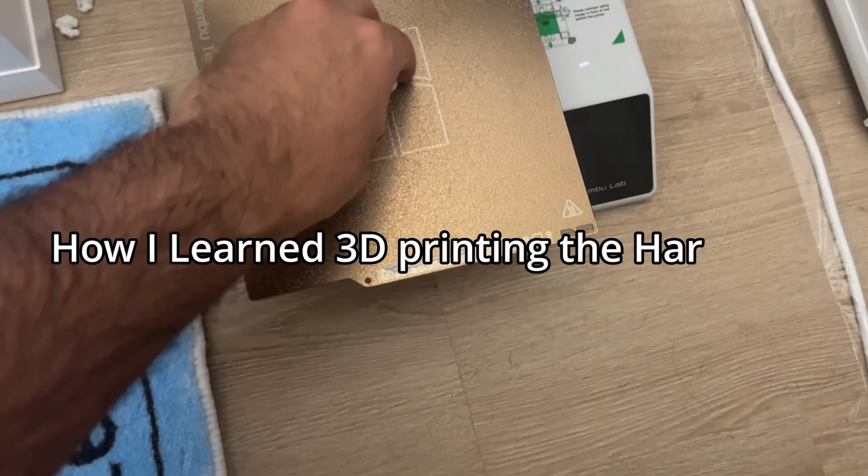Black Friday was just a few days off. And during that same time, in India, there's a festival called Diwali. Some of you may know. I was planning to visit back home, and I thought I'll give some of my friends a call and ask them if they need anything from here. Something as a souvenir, or something they don't get back in India, some kind of food, or something that would have been more expensive back there.

But obviously, I did not expect them to actually ask for something. It was going to be such a bother, like having to pack the thing, getting it through security, and actually getting it to India to them without breaking it, spilling it, or eating something if it was food. I get hungry, dude. What?

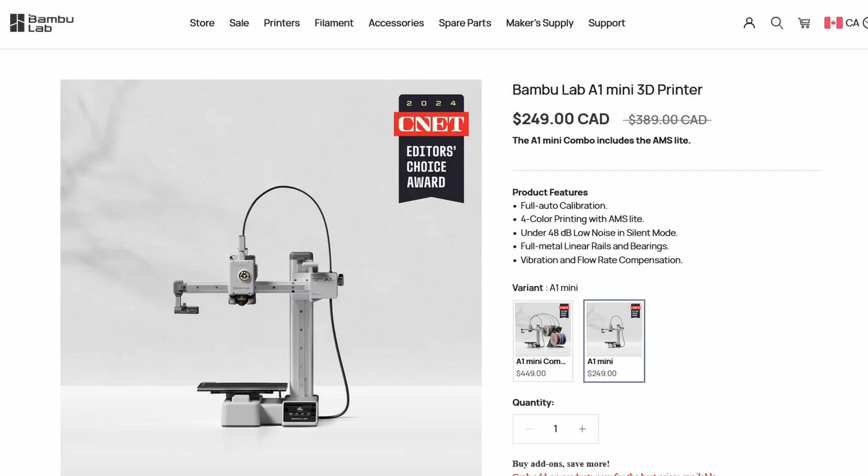But a friend of mine, let's name him something generically Indian like Rohan, asked me if there was a sale on the Bambu Lab website. He wanted the A1 Mini from their website. He wanted to get into 3D printing. He had used a few 3D printers back in university, but he never had one of his own, so he wanted one. And I checked, and there was a pretty big sale. It's usually $400, but it was $250. It was still $250 for some reason.

Oh well. And since I was the one who offered to get it, I thought I'll actually get it since he asked me. I thought it's a small 3D printer. I checked the dimensions on the website. It seemed small. It has to fit into one of my suitcases. I have bigger luggage. It should be able to fit in one of those. It arrived at my house, and that box sat in my room for 6 weeks. I had 6 weeks to check if that box fit into my suitcase. Guess when did I check? 2 hours before leaving for the airport.

I called him, panicked, and told him, "Hey dude, I tried fitting the box in the suitcase. It doesn't fit. I tried taking it out, fitting it without the box, just the printer. It wouldn't fit. It could break and blah blah blah. Sorry bro, I can't get it." And then just before he could say, hey, but did you try this, blah, blah, blah, I said, I'm getting late, I need to leave, sorry, bye. And basically he had to get the printer from India. He paid a little bit more, but I don't think he regrets it. He made some 3D prints and started selling them. He made his money back in like 2 months.

But when I came back to my house, I still had a 3D printer sitting in my room. Well, I checked if I could return it, but I was a little too late. Let's say 1/4 of the year too late. Well, now I had two options. Either I could sell it on Facebook Marketplace, or I could try 3D printing for the first time. And this is a story of how I dabbled in a new hobby and made some horrible 3D prints without knowing anything about a 3D printer.

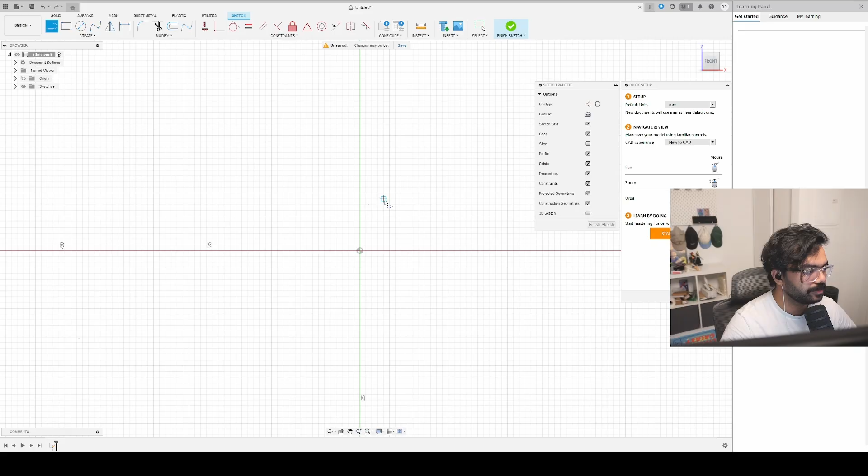Mind you, I only have PLA and PLA carbon fiber, and I did not have the hardened steel nozzle yet to use the PLA carbon fiber. I did not know if it could hold the weight of a whole human, or maybe two. Who am I kidding? Well, anyway, I took out my calipers and started taking the measurements, and the modeling was going to be done in Fusion 360. I decided to learn this because it's used for more precise modeling, whereas Blender is more for art. I don't know. Somebody on the internet told me to use this, and that's what I did.

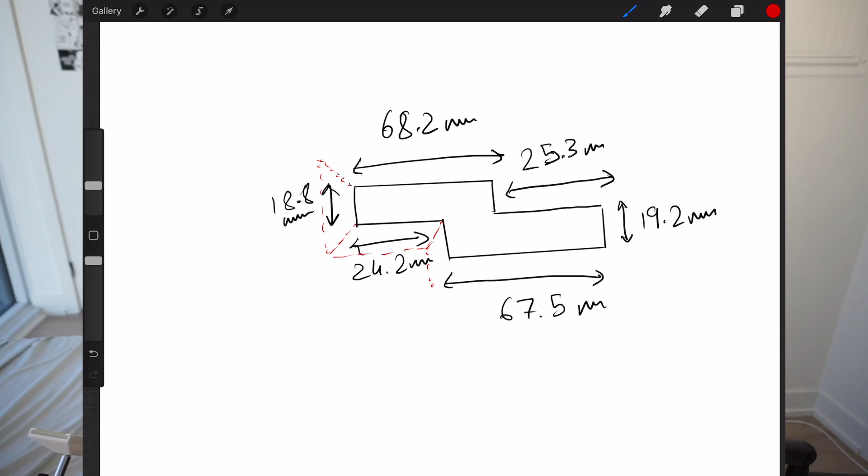And in the process, I learned something new. It was a bit hard to learn. It was a whole new way of modeling things. It's pretty different from Blender. You have to first set the constraints and then make the shapes, which is kind of new to me, but I got used to it pretty quick, at least for basic shapes. The measurements I took were used for the base, and then I made a, I don't remember, 5, 2, or 3 mm thick wall outside those measurements.

And for the height, I wasn't sure, but I was like, oh, let's lift it up like 6 inches. That should be enough. It always is. It always is. But I guess it was a little bit too much this time. It sometimes is. You can't help it. I know that the sun is setting while I record this, but I can't help this. I'm lazy enough

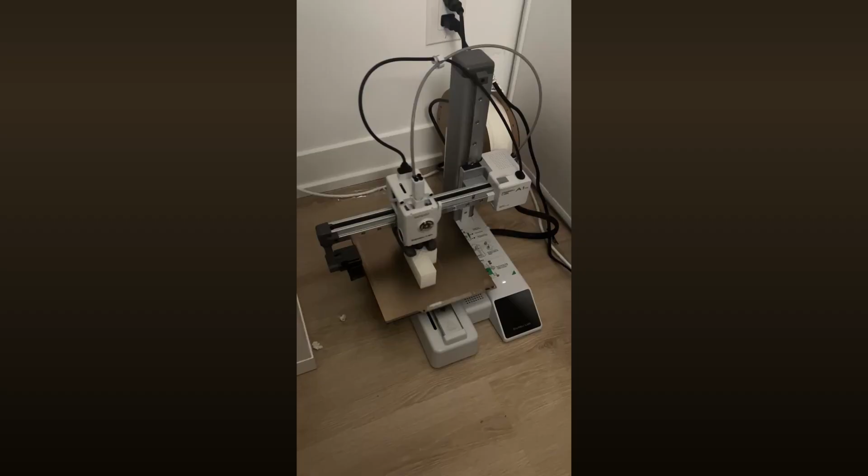already. I was so smart that I decided to print the whole thing. I didn't think of it yet that I could print just a few layers, take it off, and then see if it fits, and then make the whole thing. I made the whole thing. It was so much plastic. I wasted all of it because it was too tall, and I was scared that it'll break, or it was just not stable enough. And also it didn't fit. It didn't fit the leg.

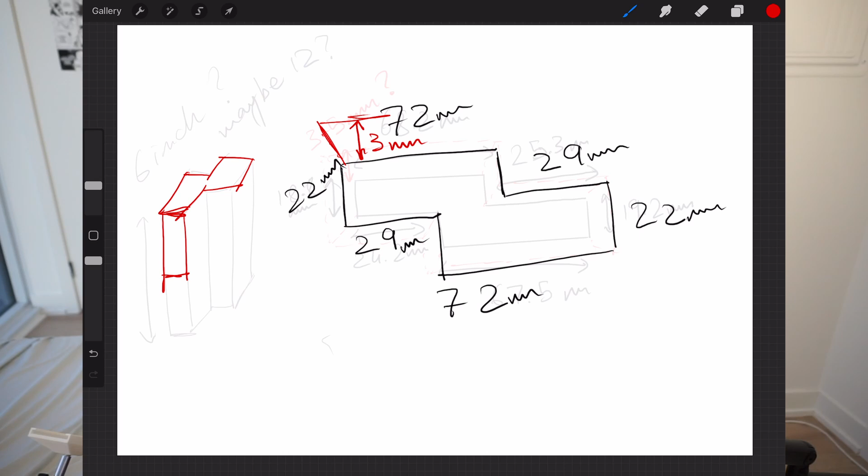See, the problem was the bed legs are wooden and all of the legs have slightly different measurements because wood is not that precise. So what I needed to do was take measurements for all 4 of them. No, fuck it. I didn't do that. I just made all the sides big enough so that all 4 of them fit, and I printed 4 of those. I did not want to waste more time on this. This was not the most challenging thing. It was just a measurement error and I didn't want to do it.

But guess what? It's been 3 months. It's working great. I've jumped on this bed. I've stood up on this bed to fix lighting. These bed legs have gone through enough. I've dropped the bed on the leg, but hey, finally, I just need to pick up the bed a little bit and then shove the boxes in, and it works. It works great. I don't have any complaints with it.

Hi, just a quick update. So if you see there, that bed leg is not there, and these are. So what happened was I printed one which was not the exact dimensions. So I just chopped off these corner pieces because this was not the right dimension, but these were. This was fine, only this thing was not the right thing. But anyways, I just chopped off these things and I had it there, out of sight, out of mind. I think that's what the saying is.

But anyways, the point is, it was there and I kept moving the bed. Sometimes I would just jump on the bed and it would move. And when I had to take out these boxes, it would move. But after doing that a lot of times, this thing cracked because I had chopped it off. So the bond on this layer had basically, you see how clean it is? It's because this was the Z-axis and this is how the pressure was hitting it, and it basically broke it. So I am printing another one right now.

Next level was an IKEA pegboard hook. Seems easier than the bed legs, you would say, but it actually isn't if you really try to make a really good hook. I knew somebody on the internet must have made it already because I got the same IKEA pegboard as the one that everybody and their mother have. But my big ego wouldn't allow me to do it, and I'm doing this whole thing to learn the process. So it wouldn't help if I just download something and print it.

This time I needed to be a lot more precise with the measurements. So I took my calipers and measured the inside of the pegboard holes, the total thickness of the whole pegboard, how much space the pegboard holes have vertically, because basically I needed the tail of the hook to go inside of the hole and then pull down on it to actually lock the hook in place. When it comes to modeling the hook, it seemed pretty easy. I just had to make a few lines, round the corners off, and make a cylinder out of it. The modeling was pretty simple, but it still took me a few tries.

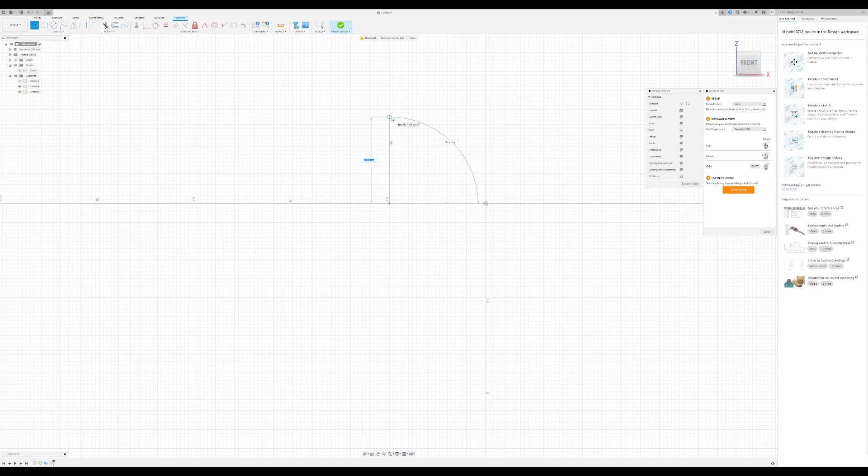I was only going to hang hats on this, but in case I ever want to use this model to hang something heavier, I would want it to be strong too. So there was a certain orientation that I needed to print it. The base is the X and Y axis, and as it gains height, it goes in the Z axis. Now, if there's any perpendicular force to the Z axis, there's a higher chance of breakage. I had to print it in a way so that the force is always parallel to the Z axis. When the first hook was done, I was pretty positive.

I took it out, I hung it on the pegboard, but it was a bit too loose. I left too much gap between the tail of the hook and the front of the hook, so it did not really grab on to the pegboard as tight as I needed to.

But the plastic was still hot. I tried bending it, I tried crimping it with my hands, and then put it back onto the pegboard. It kind of works, but still, maybe once it cools down, maybe it doesn't work. But hey, my roommate used it to hang keys. So I went back to the modeling.

I reduced the distance between the tail and the front of the hook by 0.5 millimeters and printed one again, tested it, worked out great, printed 3 more all together this time using the duplicate function on the Bambu Lab slicer software thingy. I don't know what you actually call it. Is it slicer? I don't know, bro.

Hey, it works now. I have the hats hung right over here, and you can see I use those hats every day, and I sometimes grab them and put them back on those hooks with a lot of force, and they still haven't broken. So hey, that's a success.

By the way, a genuine shout out to this thing. I know I've mentioned this already and what it does, but dude, the last time I used this thing, I was in 11th grade and I was doing a practical for my physics lab. I remember specifically an experiment where I was thinking, I'm never going to use this thing. It was a metal one, not an electrical one. So I had to measure it by hand, and sometimes the measurements were off. So I also had to write down that the measurement might be off by some millimeters and stuff. And I was like, I'm never going to use this in my life.

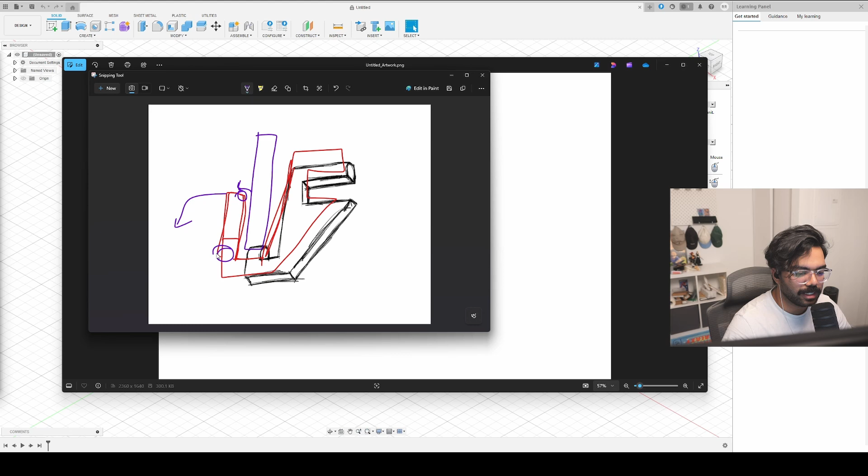And I want it to tilt so that my laptop sits like this. If it sits like this, it'll put pressure on here, which can break. So we don't want that. If this breaks, then my laptop falls. It's gonna put more pressure over here and it can break. If my laptop's sitting slanted like this, it's gonna put pressure here directly instead of here. So this is not gonna break. And here, there's nothing to break.

It's gonna put pressure here when the laptop sits. There's gonna be pressure here and here. So I have to make sure this doesn't slide off. All right, that's all I have to make sure. So I'll just make it long. And also, it's still plastic, and the MacBook is aluminum, I think. So it would not scratch it, but just to be sure, I would leave a little bit of gap so I can smoothly just slide in my laptop and take it out.

And I just needed to make sure that I have this dongle on my laptop. So my laptop needed to sit like this so that my dongle wouldn't be in the way. And also the ports are on the backside of the laptop. So again, I just need to make sure that my laptop has space to sit like that. But a hook design, I think, is pretty open to different orientations. So I don't think that'll be a problem. I made the basic model and sent it to print.

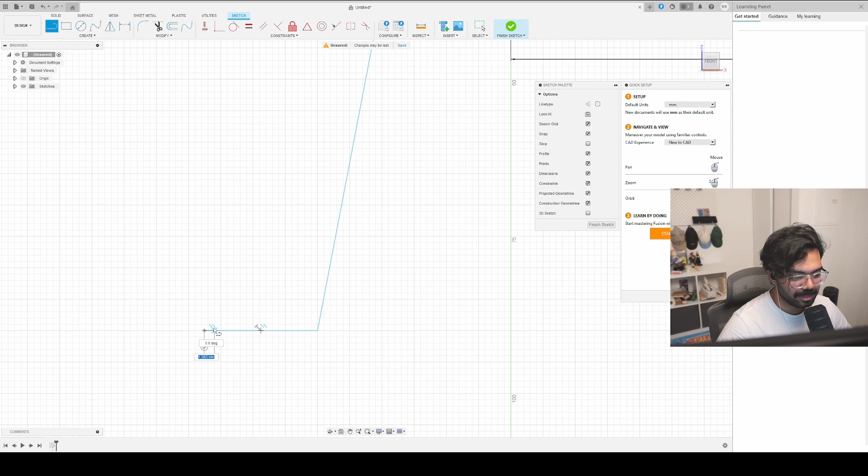But this time, I was smart. You see, we are learning from our mistakes. I just printed a few layers, like 3, 4, 5, I don't remember exactly. I took those layers off, checked if it fit my table, which it did flawlessly. Sometimes I'm amazed at the things that work out in the first go. I decided to check if it fits my laptop, which it did, but I also wanted to check if it can hold my laptop.

So I just held the clamp side of the stand really hard and balanced my $2,000 laptop on 3 layers of PLA plastic that was bending. And guess what? It fucking worked. It was holding it. Just 3 layers of plastic was holding, I don't know, 0.9 kilograms of laptop. I don't know how much this is. I was pretty damn amazed.

So this one was probably the easiest one. I just sent to print 2 of those together. It got done. And again, I made sure that it was printed in a way so that it didn't need any supports. It worked out. I had a laptop stand. It was the easiest one and the most satisfying one. Since then, I've used my laptop so much more during my workday, and it has made my work life so much better. So yeah, that was a pretty easy level 3, huh? If this is how it's going to go, the next one seems like it'll be a piece of cake.

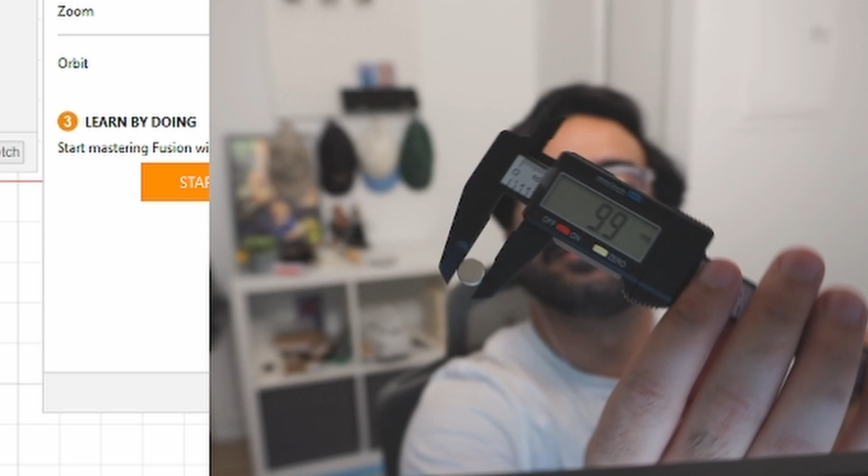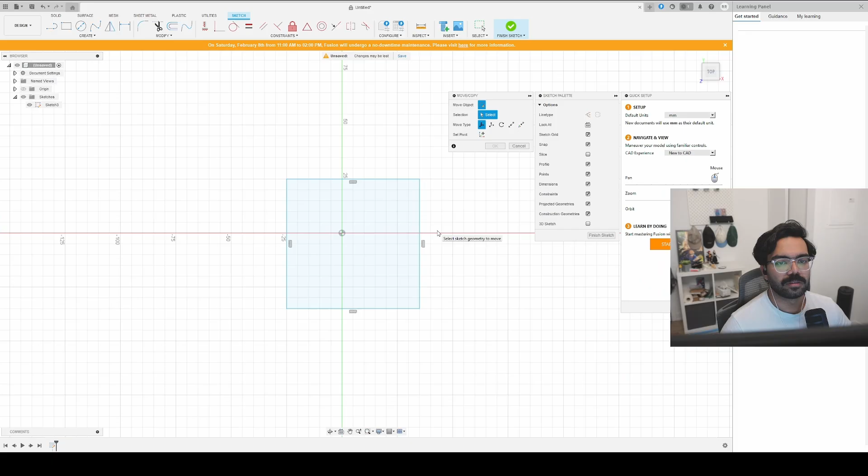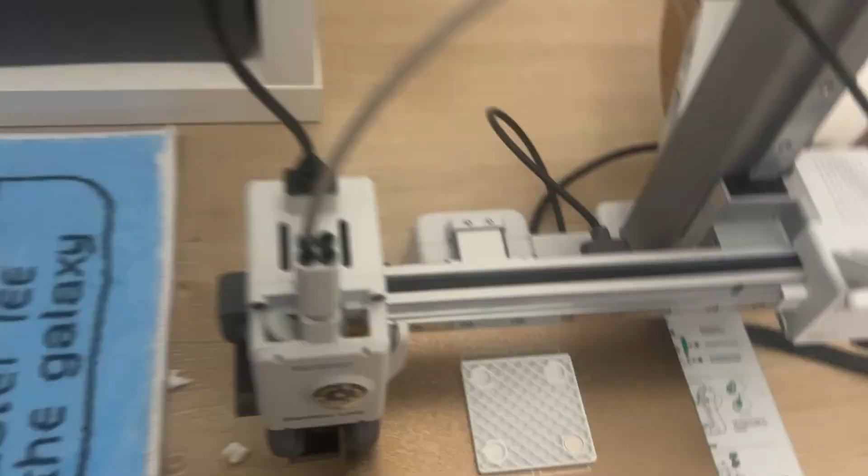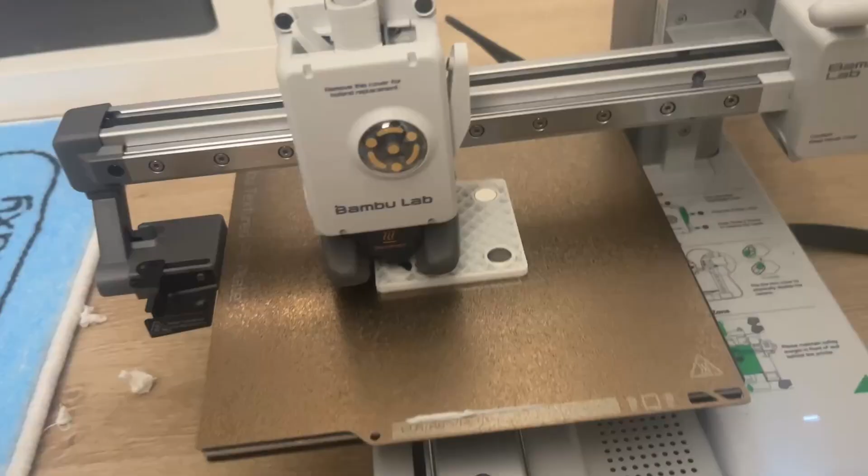Right. So I kept the modeling simple again, nothing too fancy, just simple shapes. The only thing I had to take care of was that there would only be 1 or 2 layers of plastic on top of the magnets, so that it doesn't lose a lot of magnetic strength, if that's the right term. And I would have to stop the print in between. So I would stop the print right as it's going to cover those holes, put in the magnets, and then continue the print. And it would keep printing on top of the magnets and it would conceal the magnets.

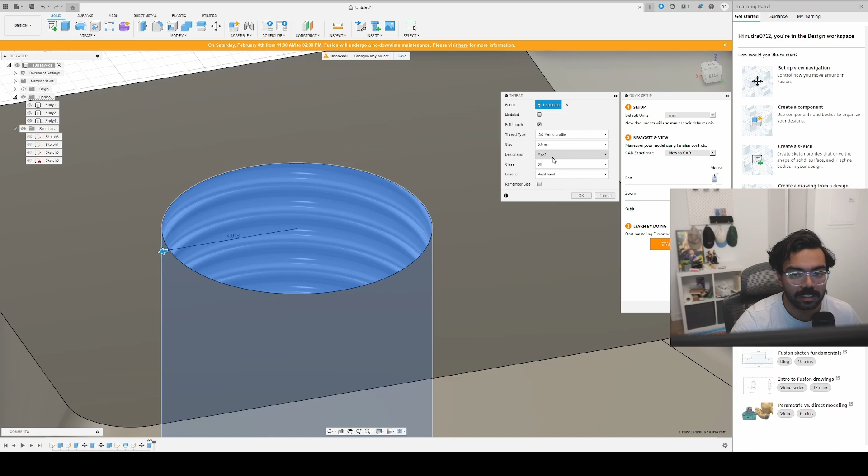Well, one of the shapes was a straight up square plate, which was pretty easy, with some cylindrical holes in it. And the other one was also a square plate with just a pyramid on top of it with a screw hole. The screw hole was the hardest part of it. But there's a screw function right in Fusion 360, and you can change the settings according to different screw standards. So that was pretty helpful, honestly. I can see why Fusion 360 is the standard.

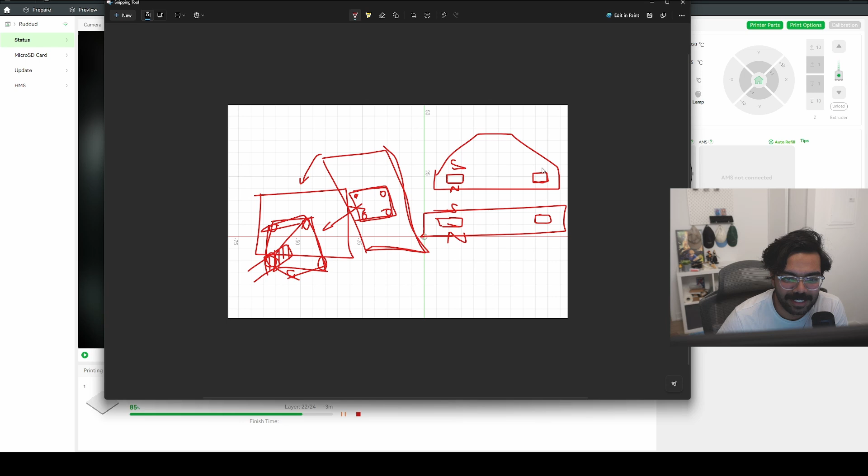After making the model and right before sending it to print, I had to make sure that the orientation of the magnets is correct. Because once I put in the magnets, I cannot change. I cannot flip the magnets. So if I put in north and the part which would go on top of it is also north, it wouldn't stick, then I'm done for. It had to be north facing up on one whole part and south facing up on the other part. And I thought 4 would be enough. And that's what I did. I sent it to print.

And to do that, I did see someone do a very smart thing. They just labeled the side of the magnets as north and south. That would have been nice, but I didn't have a Sharpie at that time, and I wasn't going to leave my stream on and just go get a Sharpie, and it was also 10 p.m. So I don't think I would get a Sharpie anywhere.

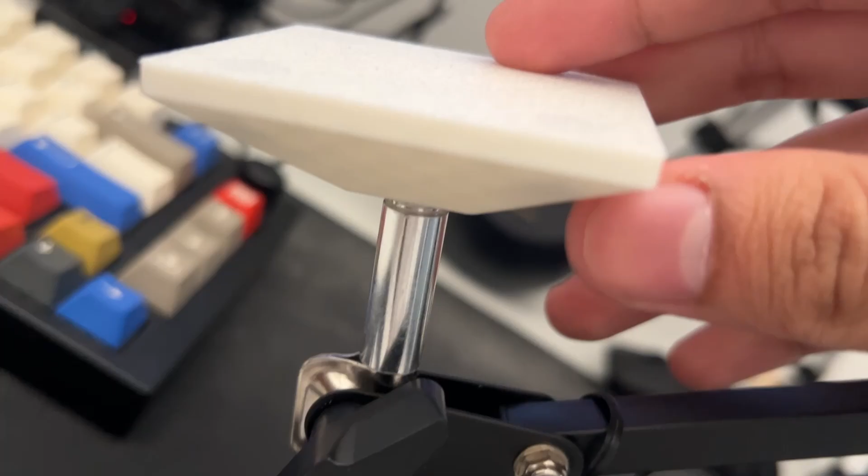After the print was done, I took it off. I tried screwing the back plate on the mic arm. It screwed in perfectly. I mean, perfectly. It was just tight enough to give a sense of security that it wouldn't crumble. And I just had to check if the back plate stuck to it. So I took the back plate. I tried slapping it on the mic arm and it didn't stick. It didn't stick. I panicked. I thought, holy shit, I must have fucked up the orientation.

I took out a knife and I started scraping the last 3 layers to get the magnets out, thinking I still have a chance because the plastic was still hot enough that I could bend it. So I started scraping with that small knife and I cut open my thumb. It was a big cut. It started spewing blood right away. I had to run into the bathroom, start washing my finger, wipe away all the blood.

And for a second, I thought maybe I should go to the doctor, but it was fine. I wasn't really feeling pain. It was just a lot of blood coming out. So it was a clean cut at least, like the knife was sharp. So it didn't hurt. And after all that was done, I came back, sat at my table. I was like, okay, let's at least try and finish the job. And I hurt my other thumb. Thankfully, it just chipped off a little bit of nail.

It didn't really cut into anything. So that was good. But I thought I'll lose my digits doing this. So I stopped. And I reconsidered if $2 of plastic is worth a hospital visit or losing a thumb.

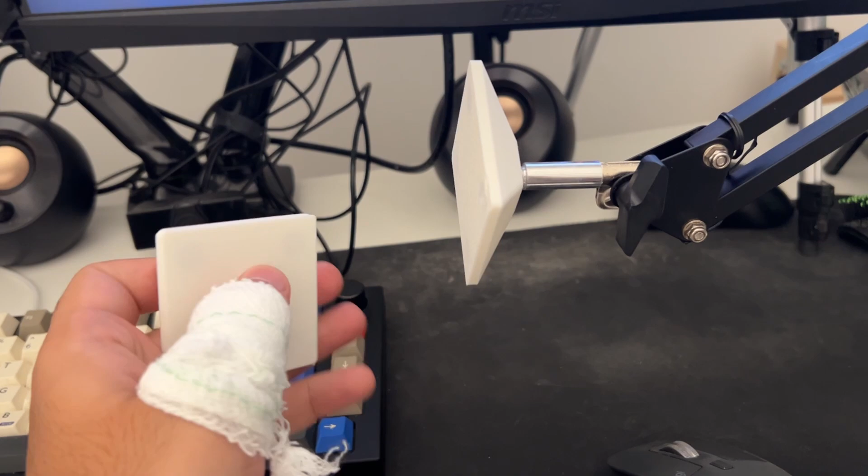Well, you know what the worst part about all of this is? The smart people among you must have already figured it out. The back plate wasn't really that thick. So if I did put it in the wrong orientation, I could have just flipped the back plate. It's just a plate and it's stuck.

When I tell you that I haven't felt this dumb since I shat my pants in 5th grade in school, it's true. Both of the things.

And most probably, I didn't mess up the orientation. I just tried putting it on the wrong way, because I remember doing it the right way. I just panicked and I cut my thumb open. But at least now I can say I spent blood, sweat, not tears, but at least blood and sweat to make this thing, okay? To make this video.

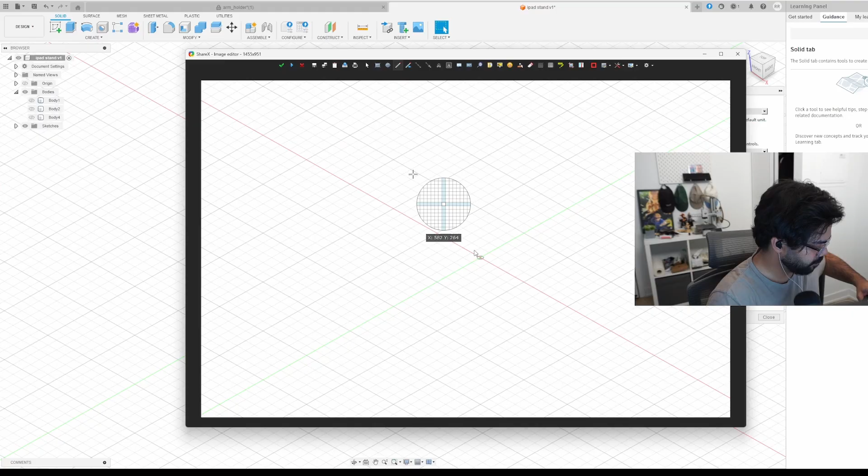What we needed was some kind of leverage, some kind of locking mechanism, or something that holds it into place and does not let gravity get its way with it. So if I make it into a notched design, like maybe it's a circle, not a square, and there's some kind of locking mechanism where I can just put my iPad on and then rotate it so that it locks in place and gravity could not pull it down.

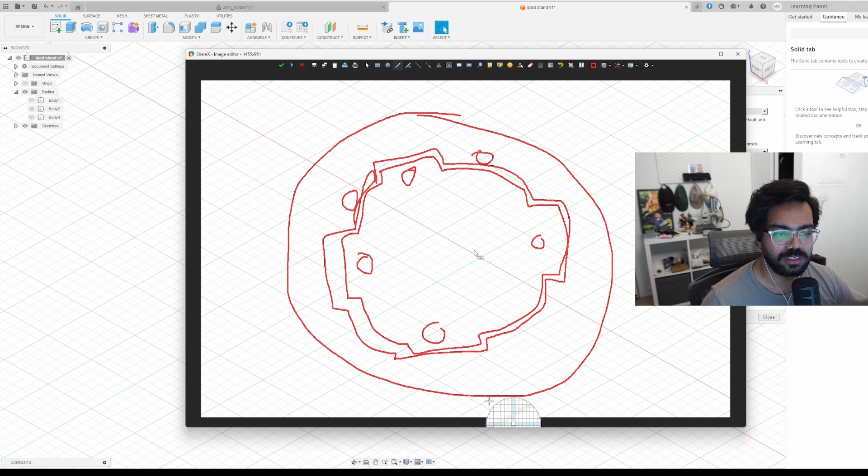Well, that's cool and all, but I also wanted to rotate the whole thing, but maybe it can rotate on the screws. And there were just so many ifs and buts. And I was like, hey, simplicity is the key. Just make the dumbest fucking thing that comes into your mind first, and it would probably work like it has till now, like it did for the laptop.

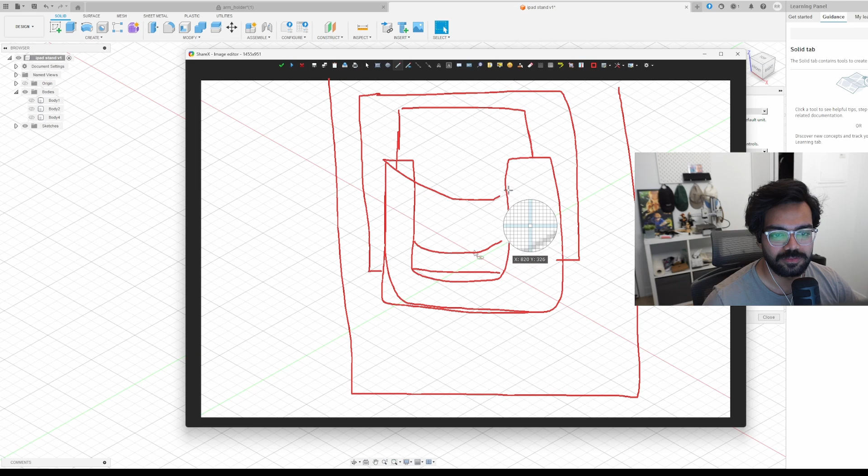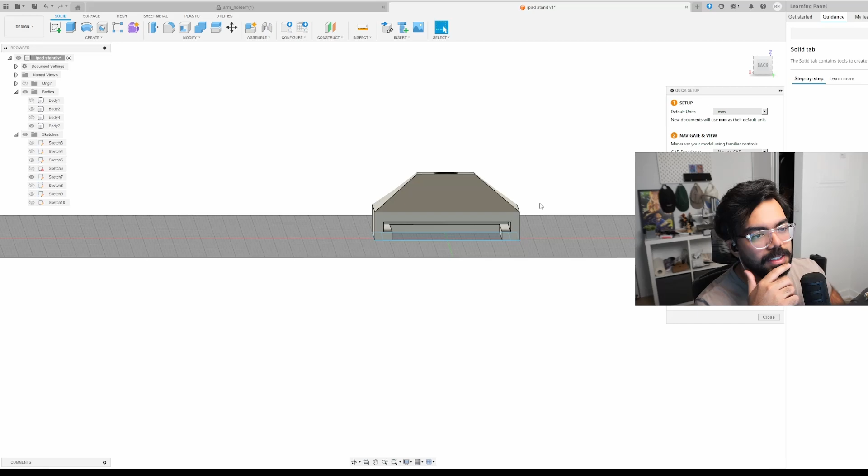So I made this notch design. It's a simple thing. The backplate has a simple notch, and that notched backplate just slots into the mic arm part, and that's pretty much it. So I tried making that design. Modeling by far has been the easiest part in this whole thing. So I modeled the whole thing, again, made the screw holes and took the dimensions on the back of the iPad. For these backplates and this whole stand thing, I've been eyeballing the measurements because it doesn't really matter. I'm not covering the whole iPad with this, so that's fine.

So yeah, basically I just made this particular design, and it would work as long as I don't flip it more than 90 degrees on either side, because then it would just slide off. I just needed it in landscape and portrait. And it's not like an iPhone where the speakers are on one side, it's an iPad, so there's a speaker on both sides. I mean, yeah, if I could rotate it 360 degrees, that would be cool, but I don't really need to. 90 degrees is fine to move it from portrait to landscape. So I thought this was going to be enough.

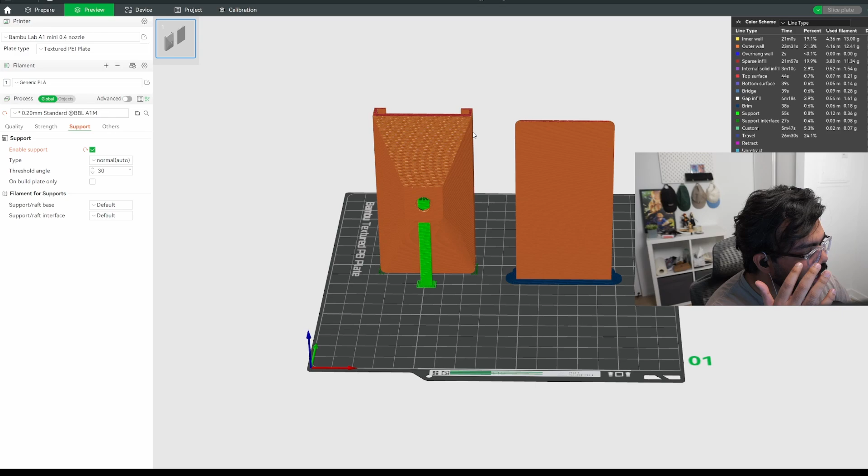Again, I sent it off to printing. I had to check the whole notch thing that goes into it, so I had to print the whole thing. I couldn't just print a few layers. So I print the whole thing. I take it off. I just try putting the notch into the mic arm side of it, and it doesn't work. It's too tight. It's way too tight. That's what she said.

And at that point, I was also doubting maybe the orientation of the print was wrong, because the way the strands were coming out of the print while pushing the backplate in was also a big reason for the friction. So I had a lot of things to consider at that moment, but I said fuck it to all of it, and I just increased the space on the insides for the mic arm part, and that's pretty much it. That's all I did. I printed it again, and guess what?

This time it was fucking smooth. It fitted in like a glove. Not like a glove. There was still a little, I maybe might have put in too much space between it, but it was fine. It wasn't breaking anything. It was smooth to put it in and take it out. That's what she said. And my only worry of it being a little too loose, there was a way that I could still fix it.

Remember magnets? So I thought, what if I put magnets on the backplate, just 2 of them, not too much, and 2 in the mic arm side, and it should be fine. I just need a little bit of friction, nothing too fancy. So the last edit to this project was making magnet holes in the model and sending them to print. No, I did not, I took a drill machine out. I learned nothing from the last time I tried scraping layers off a 3D print and cutting my thumb open. It wasn't even properly healed.